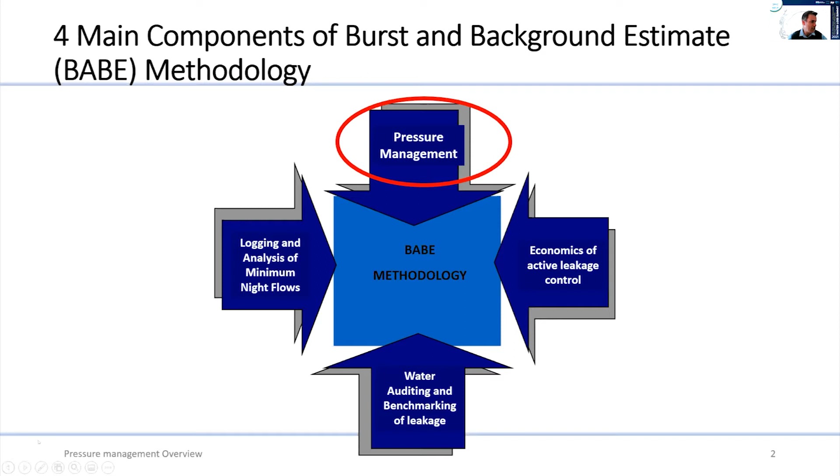It's a topic and an aspect that we are quite passionate about, and we see pressure management as one of the low-hanging fruits in water loss reduction. If it is possible to reduce pressure in a system, then you should be able to achieve significant savings from that pressure management.

Having said that, we realize that pressure management will not work in every single system. Ronnie mentioned the example of India, and I recall when Ronnie invited me to that training course many years ago. I did a presentation as I'm doing now, and went on about the benefits of pressure management, that you should do pressure management to save water. After the training course, one of the gentlemen raised their hand and said, 'But how are they supposed to reduce pressure if there is no water?' So I had to acknowledge that you cannot implement pressure management in every single area. But where it's possible to implement pressure management, that's certainly one of the low-hanging fruits that should be considered.

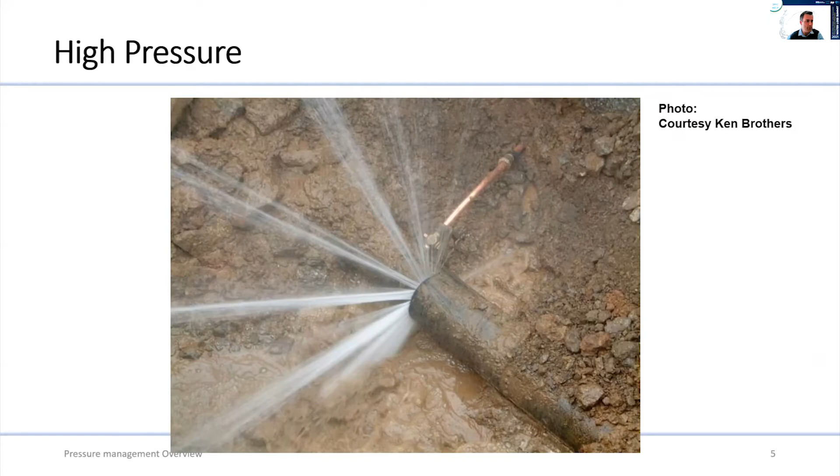So what we've noticed in some municipalities is that as a pressure reduction tool, some municipalities use an isolating valve, where they throttle the valve in an effort to reduce the pressure in parts of the network.

It's relatively cheap to install a valve, and in many cases there are already valves on the system. But the problem is that isolating valves are not made for the purpose of throttling. The valve is not going to last long if you use it for throttling, and you cannot regulate the pressure. So if you throttle the valve, you don't have control of what the pressure would be that evening, once the flows have gone down. So it's really not an ideal tool to use for pressure management.

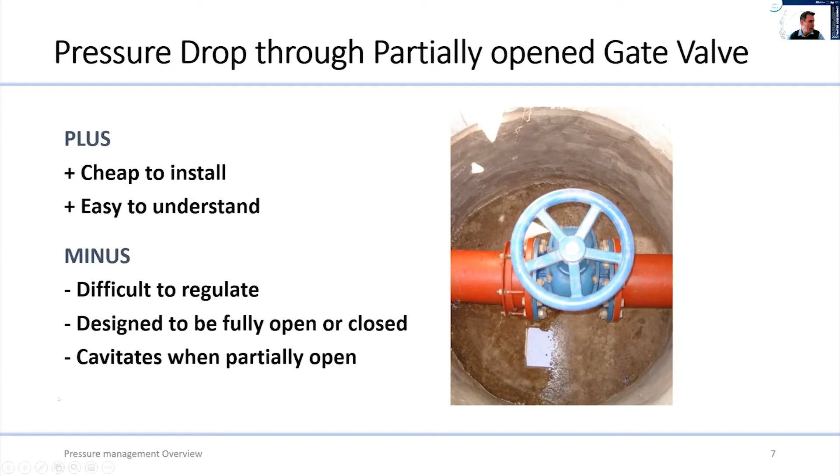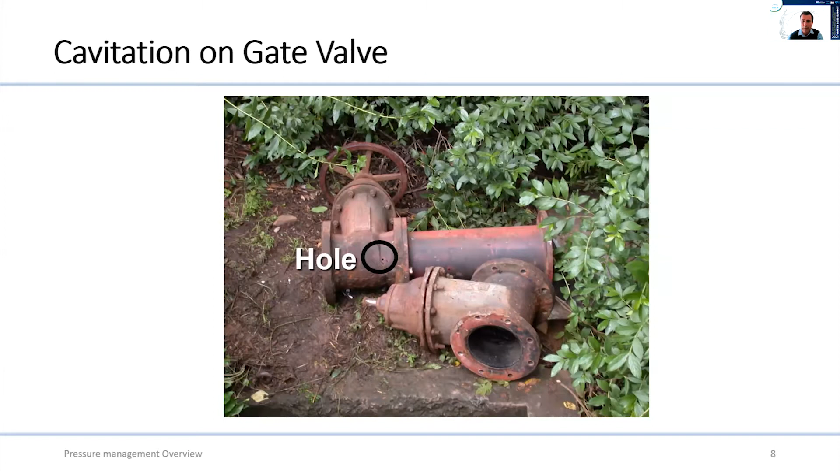In this photo, we can see a gate valve that was used for throttling, and eventually the cavitation just ate a hole right through the body of that gate valve. So it's not an ideal option for pressure management.

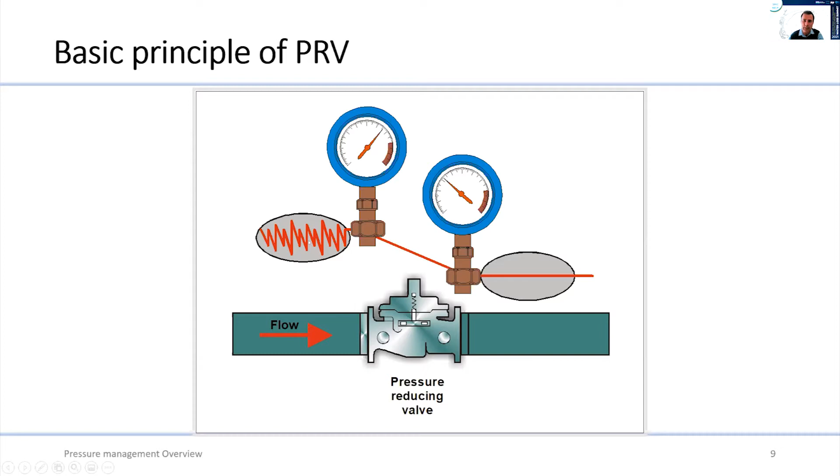So what we rather use for pressure management is a pressure reducing valve. This is a schematic of one where the high pressure comes in on the left-hand side of the valve, and the pressure reducing valve lowers it to a lower pressure. Regardless of the flow rate, whether high or low, and regardless of changes in the upstream pressure, if the PRV works correctly, it will give us a fixed pressure on the outlet. That's what we want for pressure management. We don't want a throttled gate valve that will give us a varying pressure depending on the flow rate; we want a fixed outlet pressure regardless of flow or upstream pressure changes.

So if we zoom in a bit more to the inside of a PRV, this is how it will look if you cut it in half. This large valve here is the PRV, and on top of it is a smaller valve, the pilot valve. You set the PRV by adjusting the pilot valve. Once you go into it, it's actually a fairly simple operation where you balance water pressure against the spring tension in the pilot valve, and that's how you set the PRV. You basically balance water pressure against spring tension, so it's not an overly complicated system.

You've got a few parts and moving parts, so it's a bit more complicated than a normal gate valve, but you don't have hundreds of moving parts here. There's a few parts, a few springs and a few rubbers, so it's not too difficult to understand, but the basic concept is equalizing water pressure against spring tension.

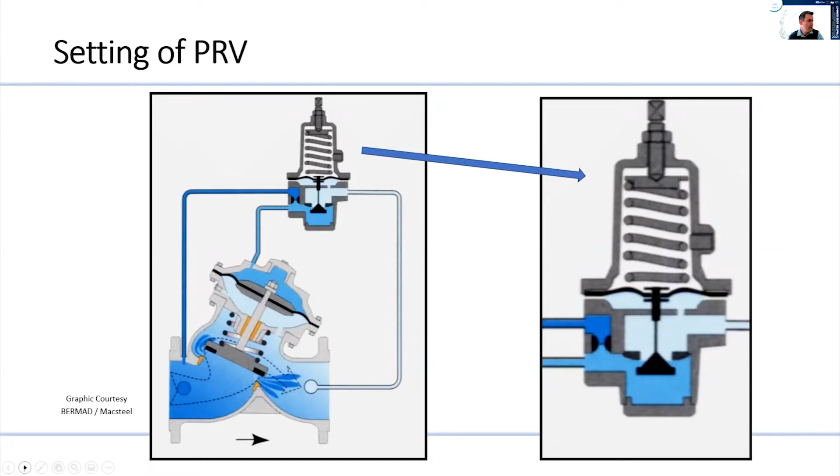So there's lots of different companies that sell PRVs. I know Ronnie likes to talk about the green, the red, and the blue PRVs. There are many companies that sell PRVs, also in South Africa. So normally when we get asked what type of PRV should be used, it's very similar to the answer Stuart gave earlier on leak detection equipment: it doesn't really make a big difference which company's valve you use, as long as it's one of the recognized companies, and as long as you're going to get backup service from that company where you bought the valve. You should be able to come right with any of the large, known companies.

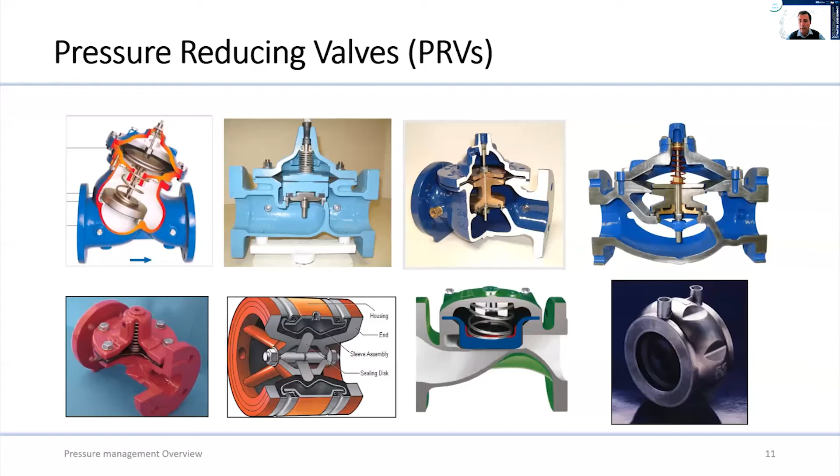So the next few slides, we'll look at different pressure management options. The first one is going to be a fixed outlet PRV, where there's just that pilot valve, which I've just shown on the previous slide. The next one is a time controller on the PRV. The third one is a flow controller on the PRV. And the fourth one is a closed loop, or intelligent, controller. So we'll go through the options.

So the fixed outlet PRV, the first option: the PRV is set to a fixed pressure, as we've seen on that previous slide. If you install a data logger on a fixed PRV, you should see more or less a straight line if you log the pressure downstream of the PRV. It's a fixed pressure at the outlet of the PRV. It's fairly simple to set up and maintain, but you must set it at peak demand periods.

Because the PRV cannot change the outlet pressure, you need to set the outlet pressure for the worst case scenario, when the pressure in the critical point of the network is going to be lowest.

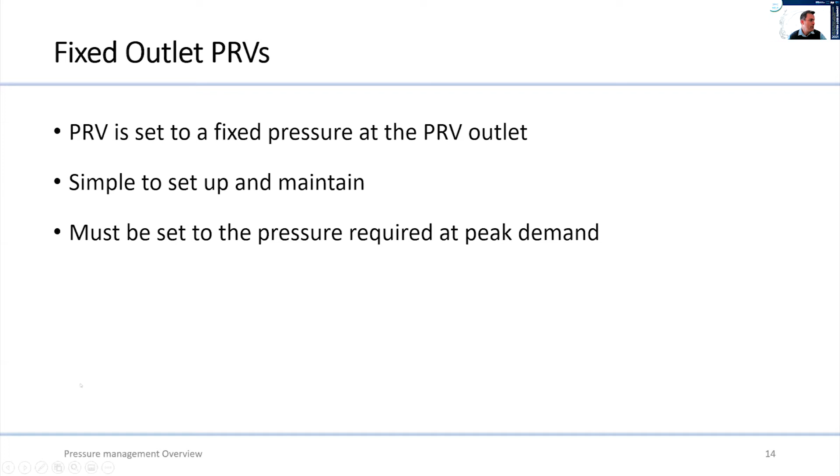So if you use pressure management with a fixed outlet PRV, we've seen many examples where significant savings can be achieved. So this is an example from Johannesburg.

On the left hand of the graph is the PRV downstream pressure, the purple line, and the blue line is the flow, before a PRV was set and commissioned. On the right hand side is the same PRV, but at a lower PRV setting. One can see just by lowering the setting from there to there, the significant impact that made on the flow going into the zone.

The main reason for that is leakage is driven by pressure. So if you are able to reduce the pressure in the system, you will reduce the leakage. And if you reduce the leakage, you reduce the total input of flow into that system. And that's what we're seeing on this graph.

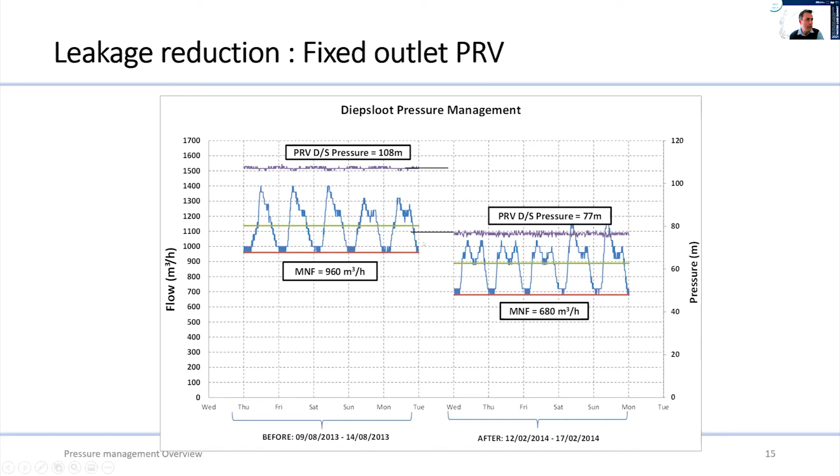So this is a schematic of how a fixed outlet PRV in the network will work. The PRV is on the inlet of the zone, and on the far end of the zone, the critical point, you are going to get some pressure variance because you've got some pressure head loss through the zone from the point where it gets in at the PRV, traveling through the zone up to the critical point.

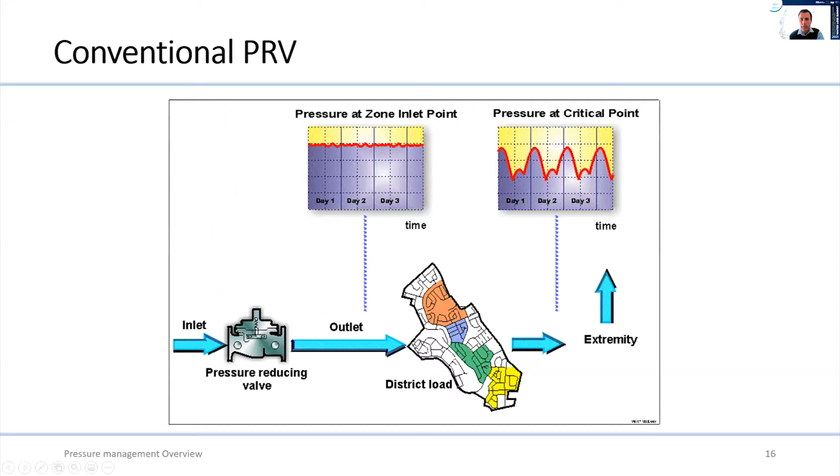Obviously, that will vary from zone to zone, depending on the size of the reticulation. But normally, you're going to get some variance at your critical point.

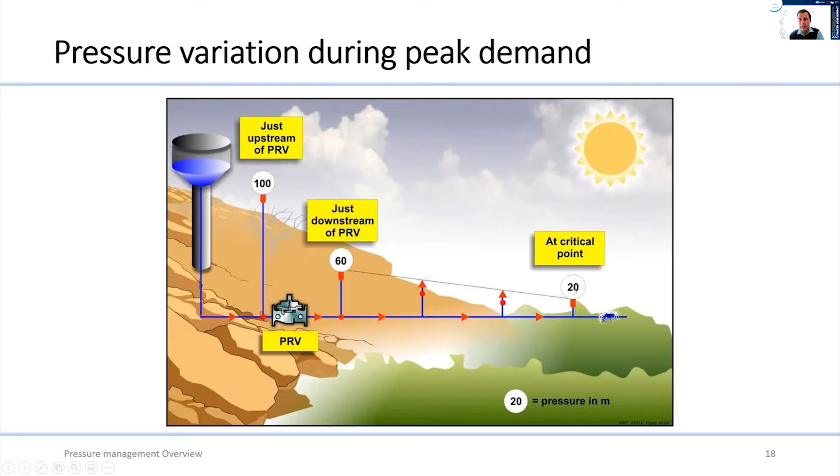This schematic shows that the PRV, in this case, is set at 60 meters of water pressure. Because of the pressure loss through the system, the pressure that ends up in the middle of the day or at the peak hour at the critical point is about 20 meters. So in this example, you have to set the PRV high enough that you get the pressure of 20 meters at the furthest end or the highest point of your zone.

At night, the pressure in that zone is going to increase as people use less water. There's less flow and then less friction, so the pressure is going to build up in your zone. So that tells us if there is a way to reduce the pressure at night further than the pressure during the day, one should be able to achieve additional water savings.

And this is where advanced pressure controllers come in. The pressure controller is installed on the PRV, and it allows you, during off-peak periods, to further reduce the pressure.

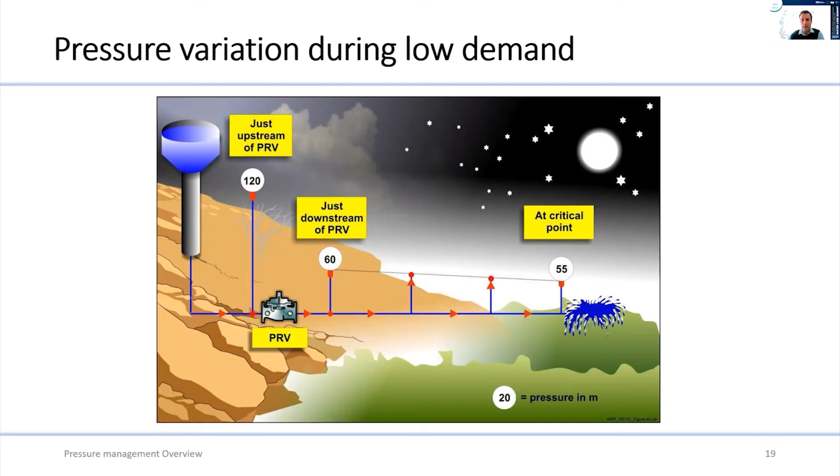The first example of a controller is the time controller. It provides a fixed time variable, so you literally set the controller to, at a certain time in the evening, lower the PRV outlet pressure to a certain level, and then the next morning increase it back to the same level. So every day and every evening it will switch between the higher and the lower pressure.

By doing that, you remove some of the excess pressure at night, and then you are able to achieve additional water savings compared to a fixed outlet PRV.

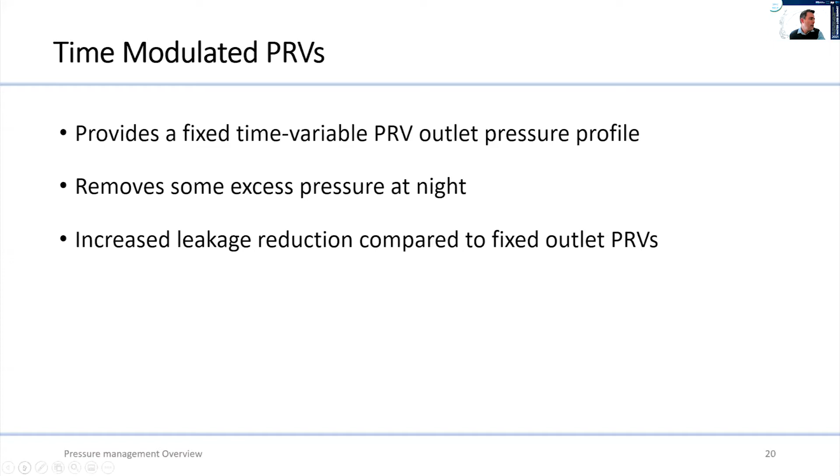The schematic for the time controller looks slightly different to what we've seen previously from the fixed outlet PRV. Because we are now reducing the pressure at night with the time controller, we are able to achieve slightly less variance in pressure at the critical point, since we are taking out some of that excess pressure by reducing the pressure at night at the PRV. By reducing the pressure at night, we are achieving additional water savings.

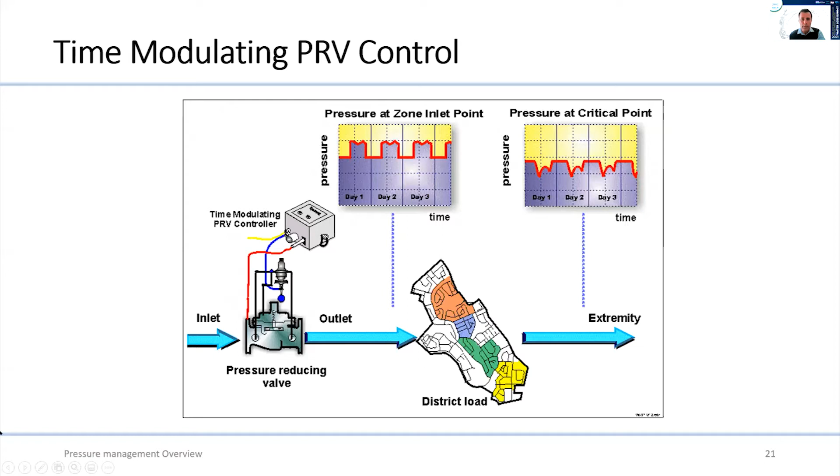This is a graph showing a time controller on a PRV. During the day, the pressure on the outlet PRV is slightly higher, and then during the night, the pressure is reduced. It goes on every day, and every evening it goes slightly up and slightly down, depending on the settings and the times that controller will go up and down. By reducing the pressure at night, one is able to reduce the leakage further in that zone.

The next type of controller we'll discuss is the flow modulated controller. In a flow modulated controller, the controller modulates the PRV outlet pressure depending on the flow that goes through that PRV installation. So the higher the flow, the higher the pressure, and the lower the flow, the lower the pressure.

The reasoning is that during peak hours, when the flow is higher, there would be a requirement for higher pressure. And in off-peak periods and at night, when the flow is lower, there would also be a lower pressure requirement in the zone.

So by using a flow modulated controller, one is normally able to get a straighter line of pressure at your critical point—not exactly a straight line, but straighter than some of the other controllers. And if you set it up correctly, you can achieve higher water savings than with a fixed outlet controller.

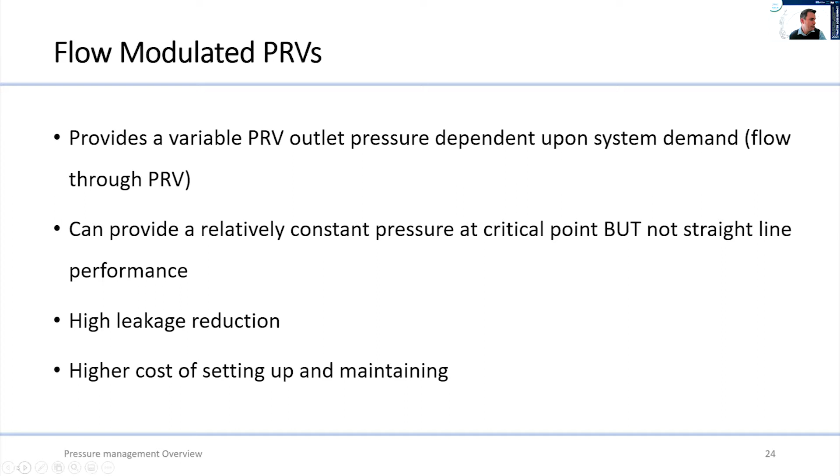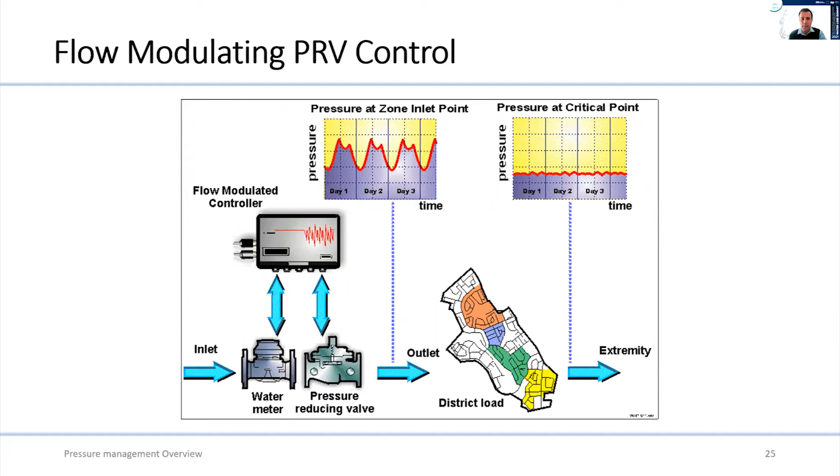Again, if you are able to set this up correctly, you should be able to achieve significant water savings. But it also comes at an additional cost, and there are now more factors to take into account.

For example, the communication between the critical point logger and the controller—you need to consider what happens if that communication is not there anymore. So there's a bit more that can go wrong with this controller than with some of the previous options. We would consider this controller maybe in certain zones where significant additional water savings can be achieved compared to some of the previous methods shown.

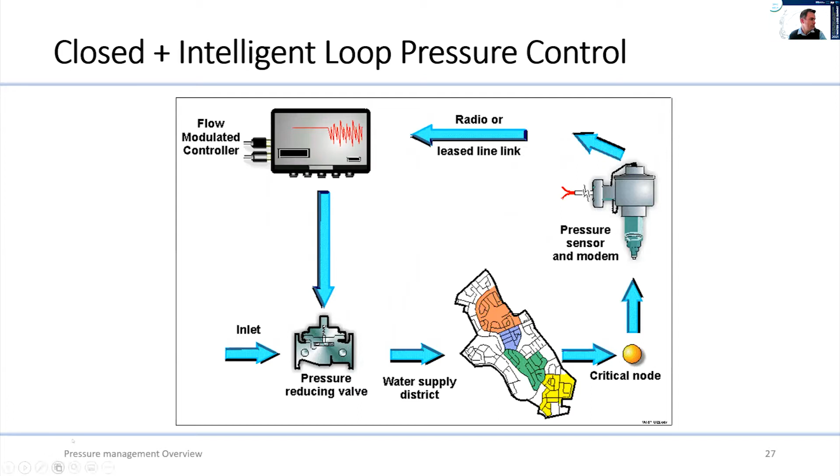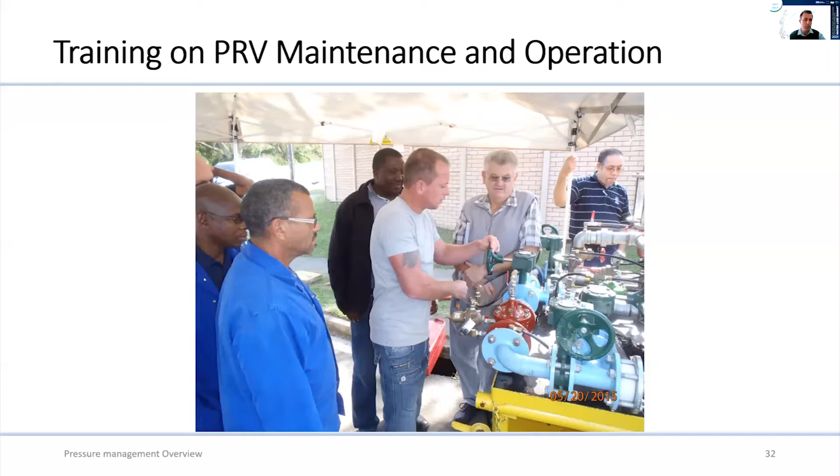So maybe the IT people on the poll, is it possible to put the results now on the screen? All right, okay, so just for interest's sake we can quickly scan through these. Right, okay, I've got the results on the screen.

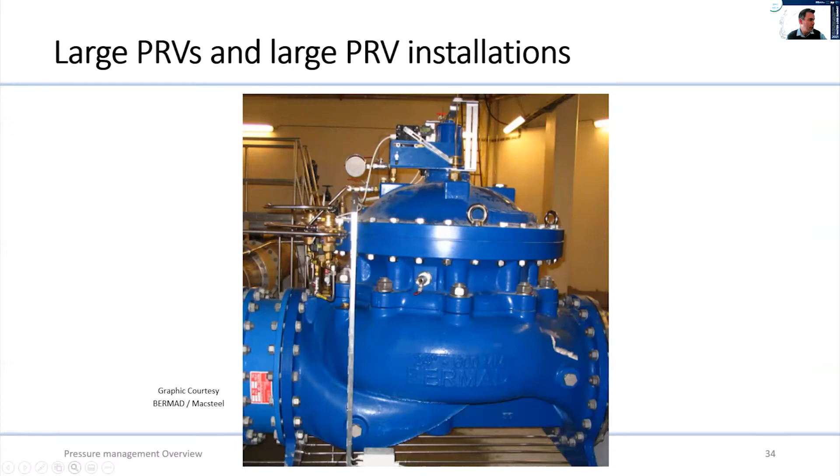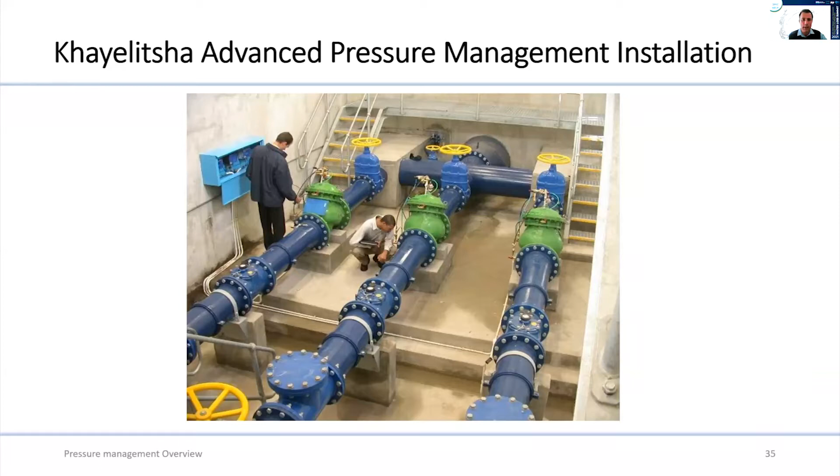The savings achieved on this Khayelitsha installation were enormous. It resulted in water savings of 9 million cubic meters per annum, an incredible water saving for one project.

Cape Town is also busy with a new PRV installation. Khayelitsha has developed over the years and the demand has grown, so Khayelitsha is now getting a new bulk supply from the eastern side. With that new bulk supply there was also a need to install a PRV. We assisted with the mechanical design, and Ingerop is doing the structural design and implementation. That installation is currently under construction, and they hope to commission it in the next few months.

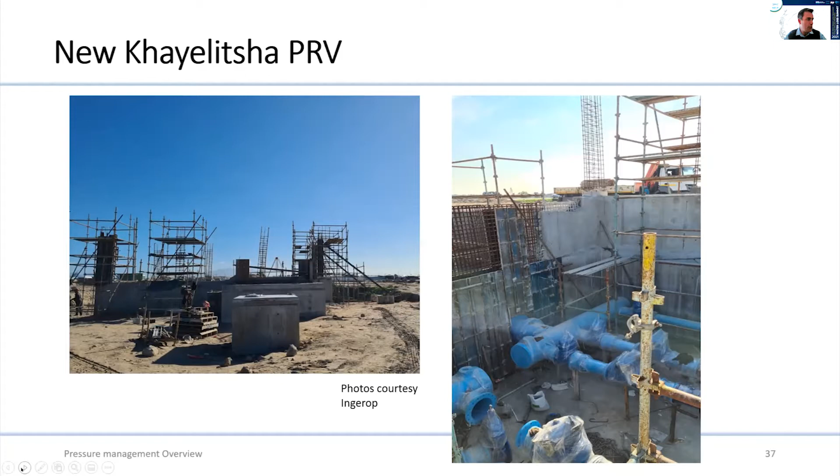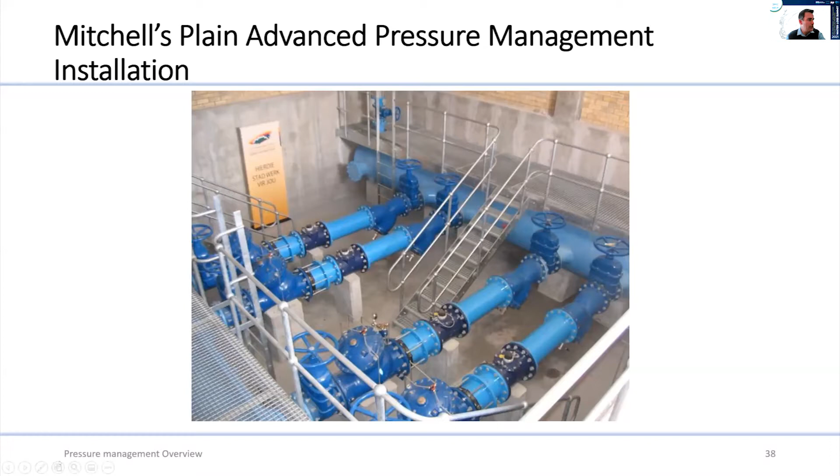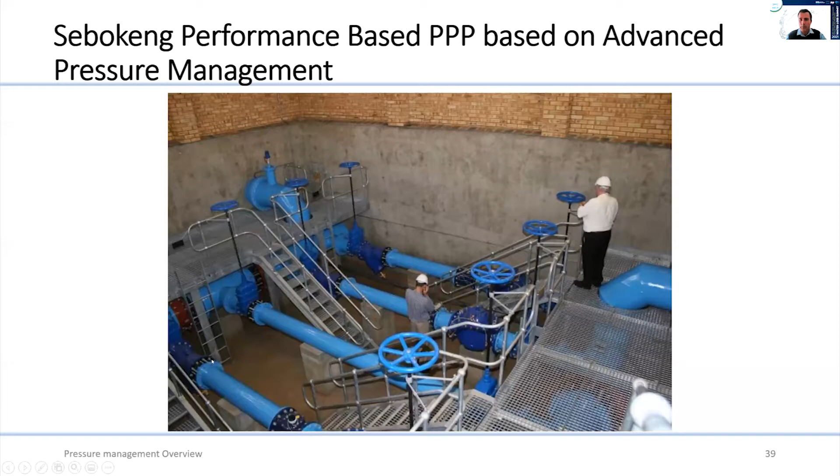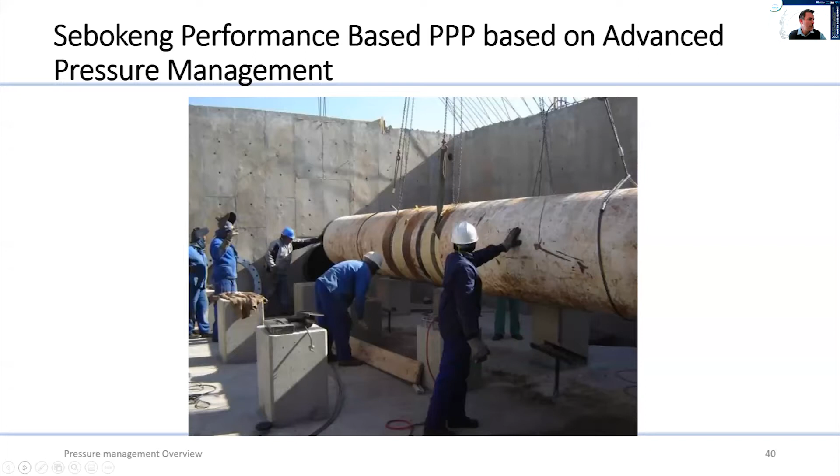The third large PRV installation is in Sebokeng, Evaton. There's a photo of the Sebokeng Evaton PRV installation, and a few photos of the construction process - the pipe before the PRV was installed, and the complete PRV installation that was cut in on one day.

There was a requirement from the municipality that the water supply to Sebokeng and Evaton had to be back online within a very short period. Between the team that designed the PRV and the contractor, they came up with a plan of constructing the whole PRV installation on the side, and then once the water pipes were cut into, that complete installation was lowered in place. The water was back on, in less than 8 hours from start to finish.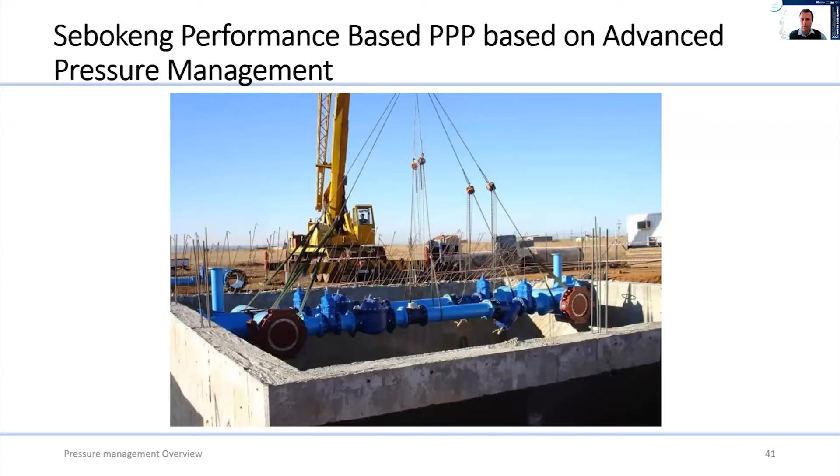The Sebokeng installation also achieved significant water savings - 8.5 million cubic meters per annum. This shows that where it's possible to install a large PRV installation, the savings achieved can be astronomical. In the case of Sebokeng, it's approximately 2 Olympic-sized swimming pools every hour, or 2,800 cubic meters of water night flow.

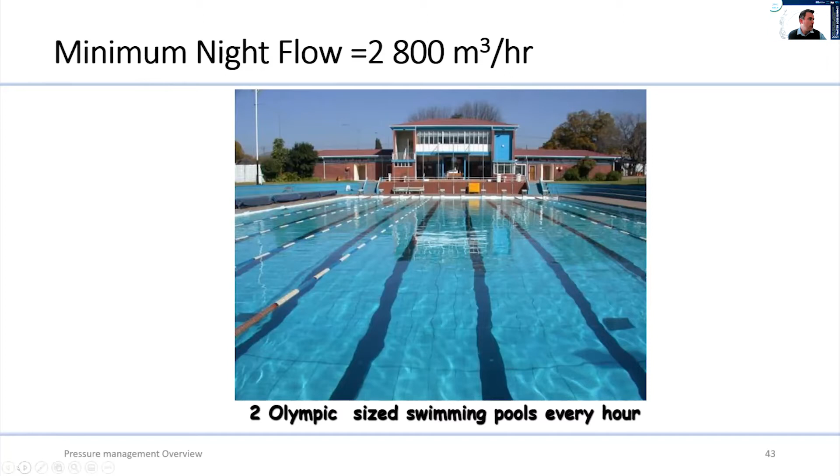So in summary, the large PRV installations - we were able to achieve significant water savings.

The last two slides I'll show are on PRV security. We've seen over the years that unfortunately, in many cases after lots of effort was done to get a PRV installation to look really good, and you've maybe installed electronic equipment to monitor and control the pressure, if you then get vandalism and theft in that same installation, it can significantly set back the municipality's plan to reduce water loss. So where possible we try to encourage municipalities to secure PRV chambers, because it's very easy to vandalize a PRV chamber if you can get inside. There are a number of solutions - the one on the screen is quite an advanced one.

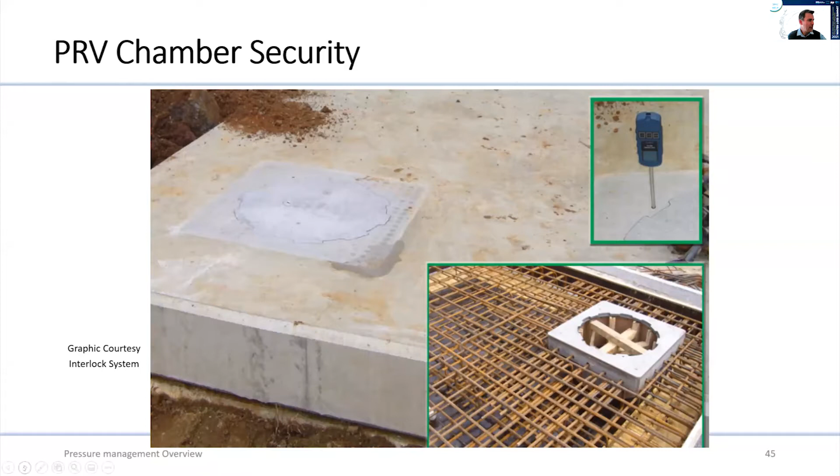We equipped the PRV with a new pilot valve and installed the data logger. A week after that, everything was stolen. Then I realized there was a reason why that snake was in the chamber. So I laughingly look back at it now, and I think maybe there's some merit in that, but only for municipalities that are able to handle the snakes in the chamber.

So thank you all, I'll leave it then. That's the end of the presentation. Thank you.

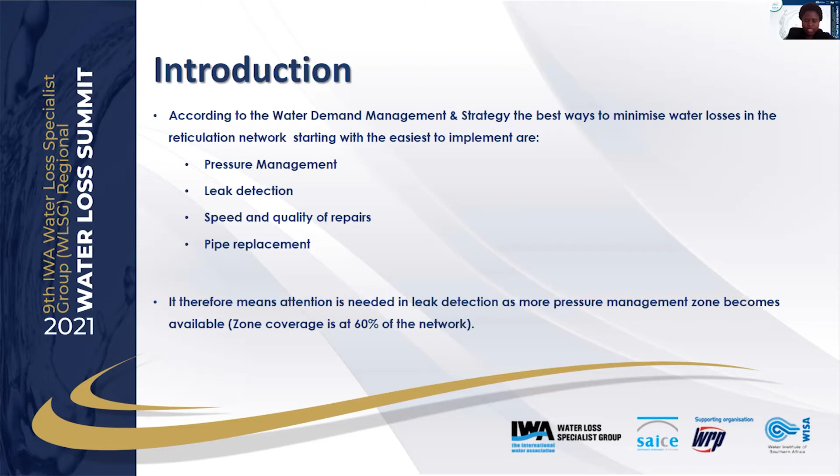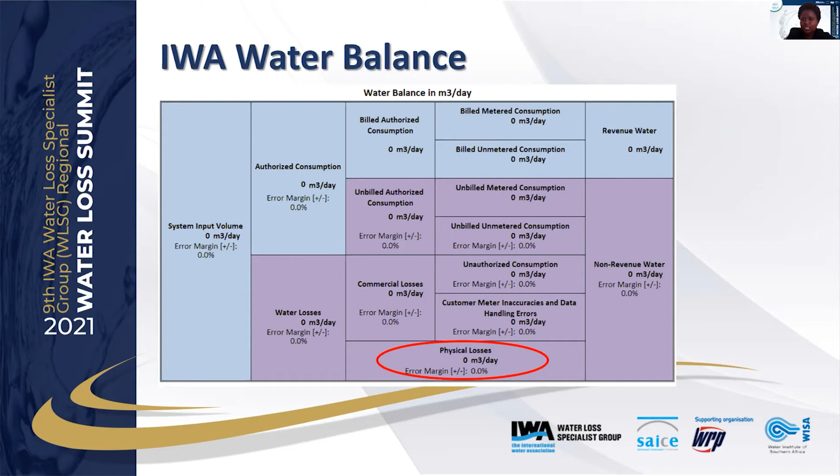In our water balance, leak detection aims to reduce the physical losses, which will benefit in reducing the non-revenue water. Why are we doing leak detection?

We detect the existing visible leaks. There are those leaks that are not reported, that go unnoticed for a lengthy period of time. We detect existing non-visible leaks, using different leak detection equipment to detect noise emitting from the reticulation network, such as valves, fire hydrants, and service connections. We give support to reticulation depots to pinpoint and locate the location of existing leaks. As we know, water finds the way of escape, which is not necessarily where it is originating from. So we detect the origin of those leaks.

We also improve repair response time by reporting all the leaks, creating a C3 notification to the relevant depot, so that the depot can attend to and repair those leaks. The target response time is 2 days.

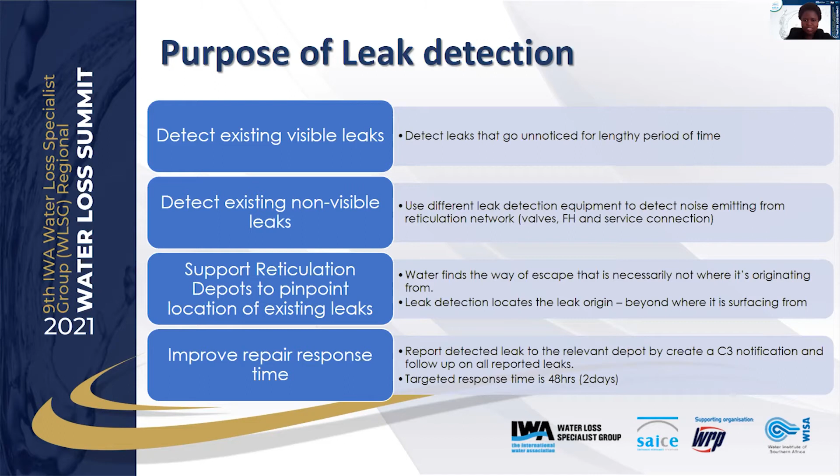The equipment we use at the City of Cape Town includes the mechanical listening stick. It is used at all contact points, such as meters, valves, and fire hydrants, to detect the noise emitting from possible leaks. We also have the electrical listening stick, but the mechanical one seems to work best for us. I guess our hearing ability is too sharp.

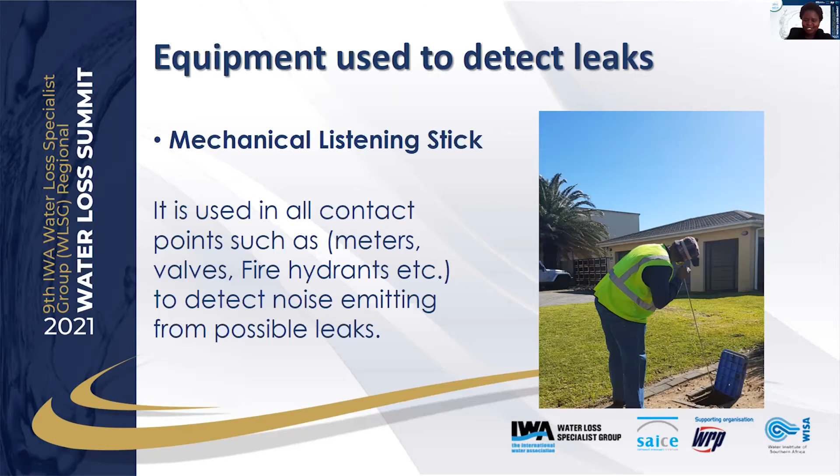We also use noise loggers. These are deployed on every pipe fitting, such as valves and fire hydrants, either valve to valve or valve to fire hydrant, detecting the noise emitting from possible leaks. We program them over a predetermined period of time to record any leakage noise. As mentioned, the best time is 2 a.m. to 4 a.m.

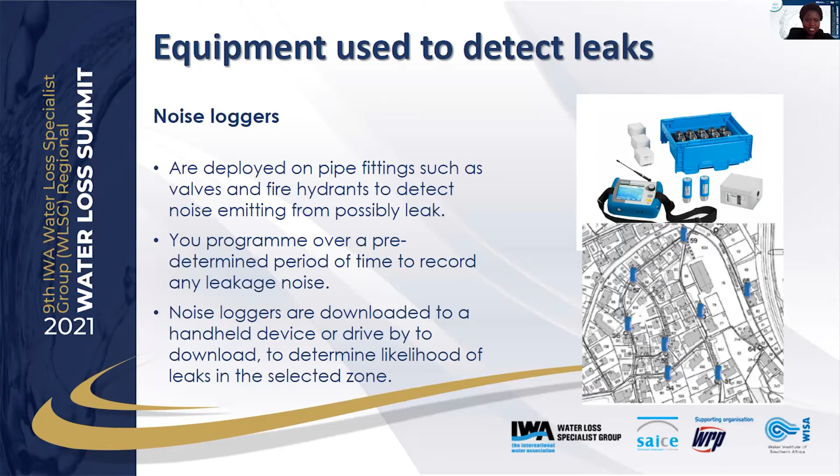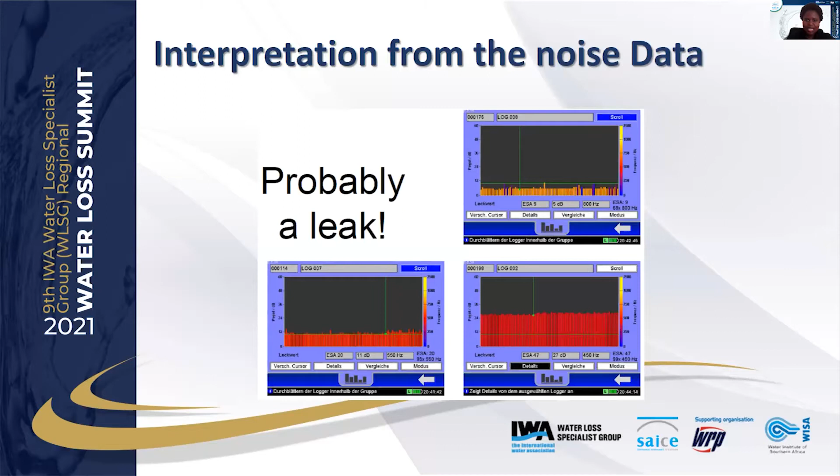Then we use the leak noise correlator to locate the leak. Fire hydrants, valves, and meters are used as points of entry to the pipeline. You must know your pipe details, such as pipe material and pipe diameter, and then measure the distance between your two sensors.

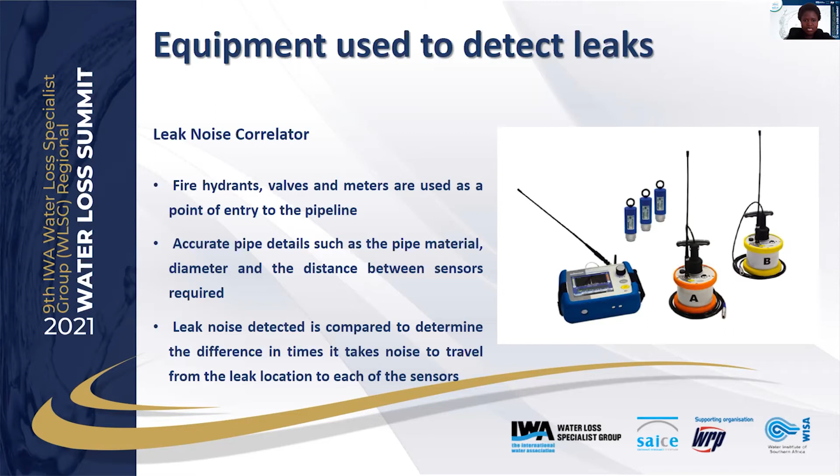The picture coming up now shows that after you have done your correlation, you measure where your correlation curve is. In this screen, it's showing that it is closer to sensor B. So we measure from sensor B to where the leak is, at 10.2.

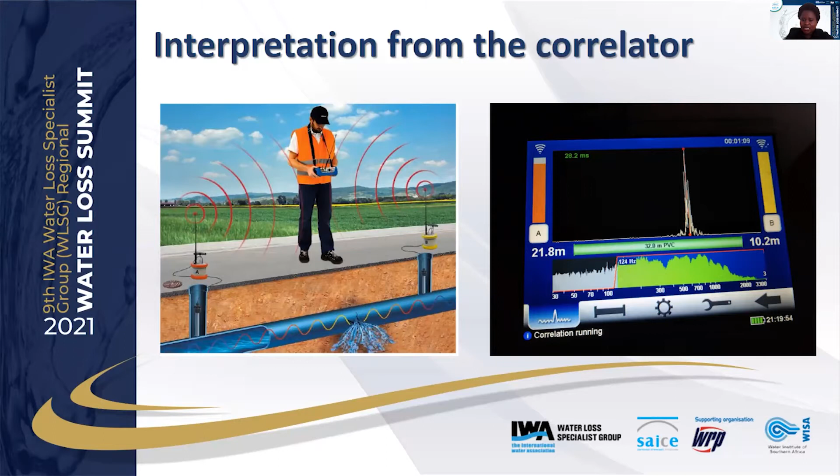You then use your ground microphone to pinpoint or confirm the correlation results you've got, to pinpoint the leak. The ground microphone does not need any contact point; you can use it on the surface of the ground. You move it along the ground surface above the underground pipeline. The principle of this device is that the closer you are to the leak, the greater the leak noise will be.

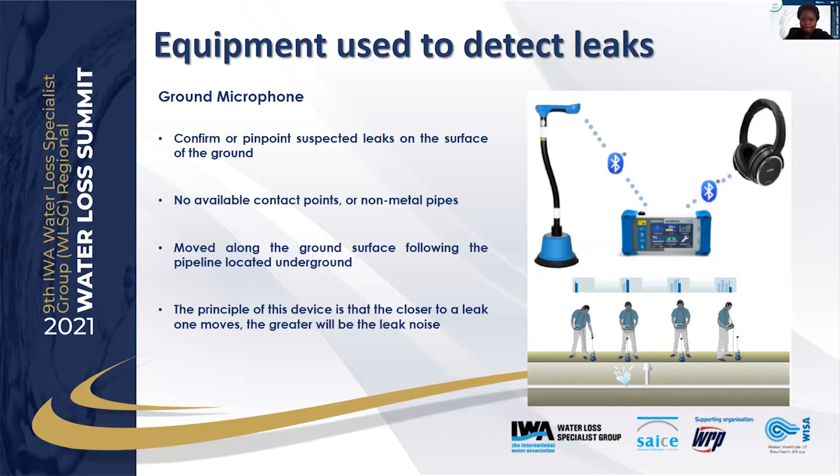We also use temporal data loggers on the DMAs that don't have permanent controllers. It is used to measure the flow and the pressure in order to analyze your minimum night flow.

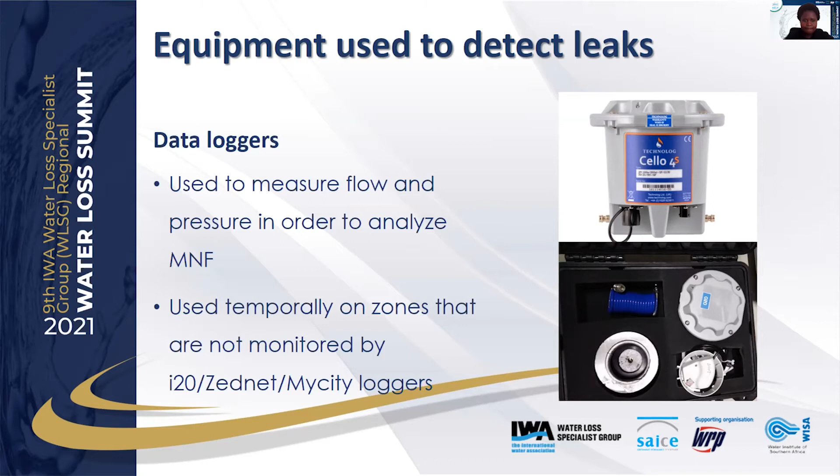Another piece of equipment is the GPR, the ground penetrating radar. We use it to locate services that are underground, mostly to locate the pipe direction and depth. If we're working in an area and we're not sure whether the pipe stops, continues, or which direction it's moving, we use this equipment. It's very helpful so that as we use our ground microphone, we know where the pipeline is running.

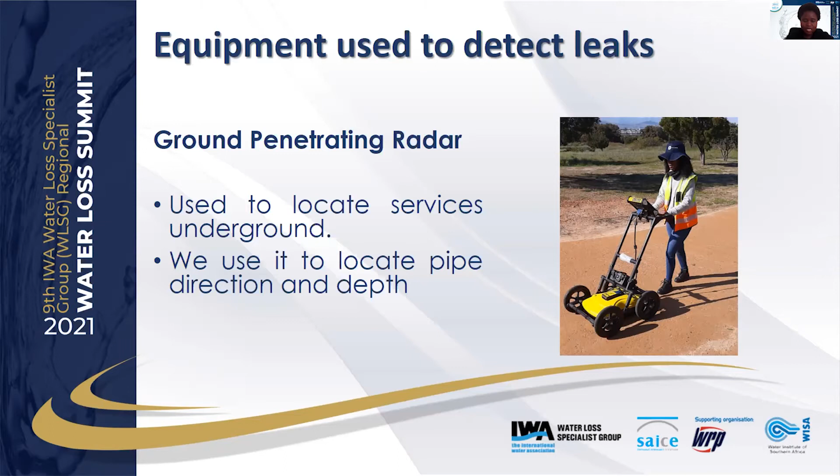The methods we use for leak detection are 4 methods. First, visual leak detection, whereby the team drives or walks on the street to inspect the reticulation network for obvious ground leaks, on the reticulation network or on service connections. We have a 3-kilometer target per team per day.

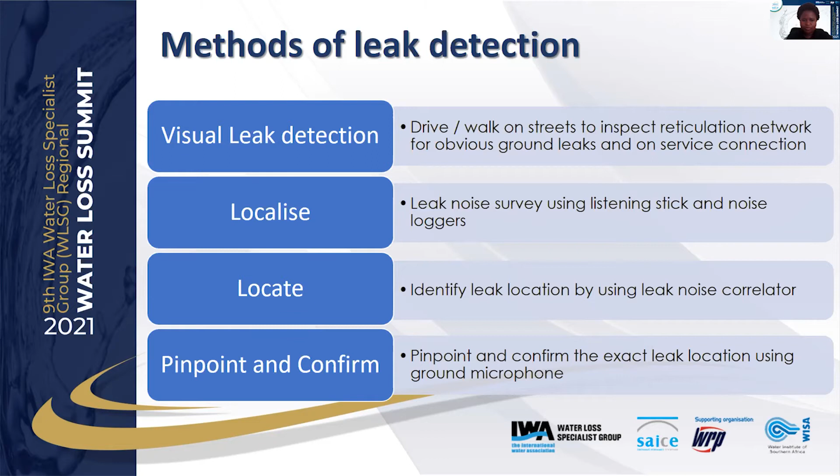We then localize the leak noise survey by using the listening stick and noise loggers. Then we locate by identifying the leak location using the leak noise correlator. Then we pinpoint and confirm with the ground microphone. A step test is also part of the process.

As we start with a bigger area, then we isolate it into smaller sections while monitoring the flow. The best time is to do it at night when demand is less, because we'll be shutting off some valves. While you are sectorizing your areas, you keep monitoring your flow. Where there is a disproportionate drop in flow, that's where the suspected leak is, and that's where your focus will be. So you start from a bigger area and shut it down into smaller sections until you get where the suspected leak is.

Then you continue using your methods of leak detection to identify where the leak is. There are different approaches we use for leak detection. For areas that are non-discrete, we use a scorecard approach, whereby we need to know the type of material, age of infrastructure, average pressure, pipe burst records, the soil type, the period of supply, whether leak detection was ever done in the area, and also the type of land use - is it residential or industrial?

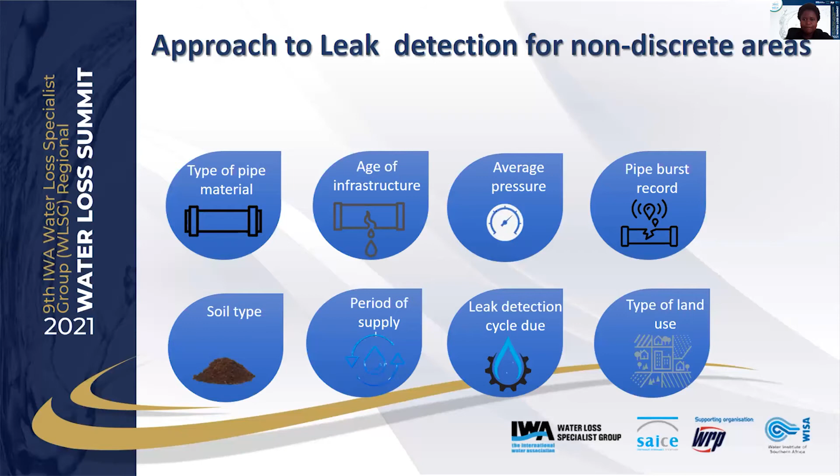Then for the ones that are discrete, we use zone analysis, because our zones are monitored by controllers such as I2O, Zednet, My City Logger, and then we analyze the minimum night flow over the average flow. For all the zones that give 30% of the average flow, we target those zones to start with.

We also use the SANFLOW model, where for each zone you must know your minimum night flow, your average pressure, the length of main, number of connections, number of properties, and residential population. It will give you an expected leakage, and if it is above the threshold that you expect, you can target those zones. We also calculate the unavoidable annual real losses.

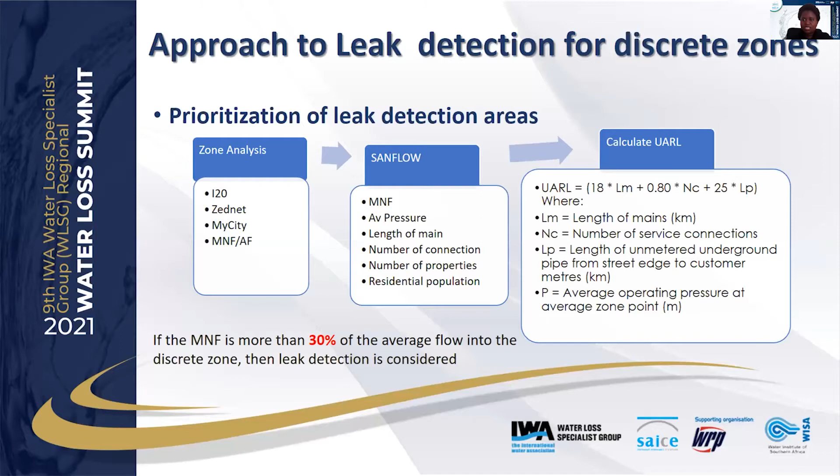So for all the zones that are above 30%, we target those areas first, because at the end of the day we want to see results and reduce that minimum night flow. This is an example of a zone with a high minimum night flow. The PRV had 8.6 cubic meters per hour, and the average flow is 16.49, giving us a percentage of 52.4. This is an indication that leak detection must be prioritized in that zone.

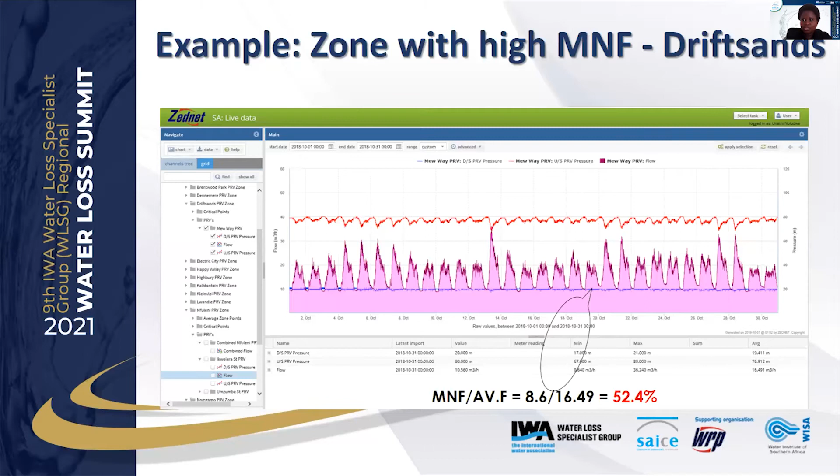So for the past 3 years, we have managed to cover the whole of the City of Cape Town network using visual methods. It's only the last financial year whereby we started to use equipment looking for non-visible leaks. Per year, we cover half of the reticulation network.

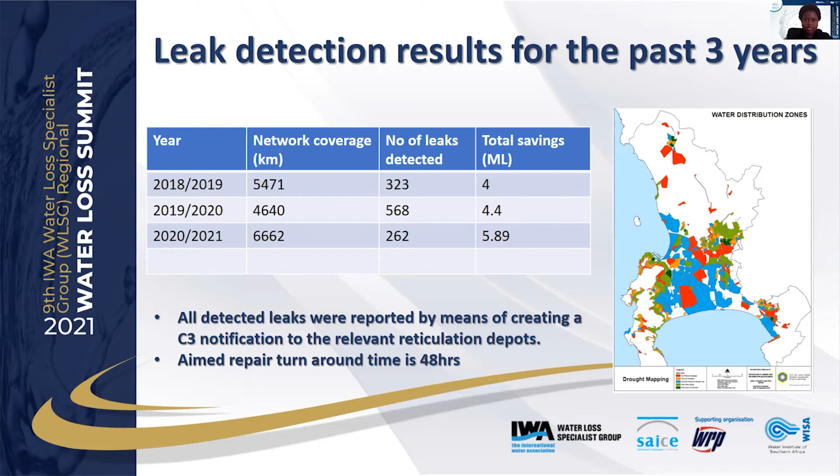So for all the leaks detected by the team, a C3 notification was created, sending it to the depots to attend to and fix them. All the leaks were fixed, but not all within the turnaround time. The turnaround was 48 hours - we still aim to repair those leaks within 48 hours. For the past 3 years, most leaks were occurring from meters, then service connections, valves, fire hydrants, not much on the main. Last on the list was the stopcock.

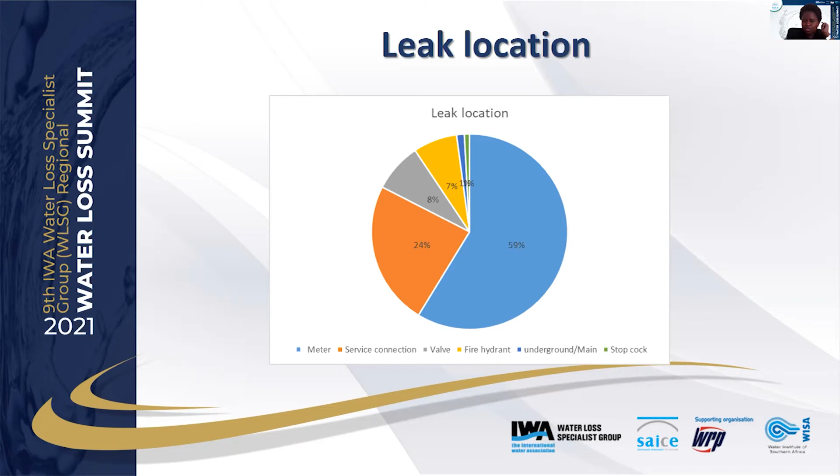This is an indication why response time is very important, because the volume for each leak, you multiply it with the response time. If the leak took a day to be repaired, that means there is less water lost. But if the response repair time period takes longer, it means you will have much more water that we are losing. Also the location duration is important to note.

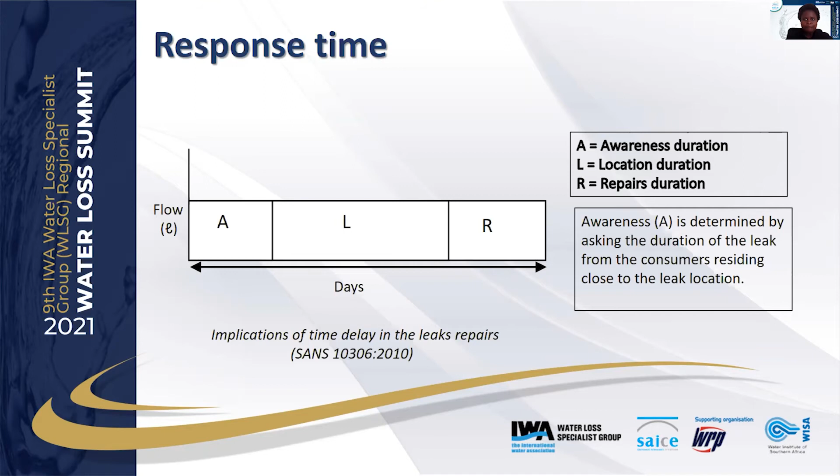So these are just pictures of the leaks that we have found. The first picture is a valve. Already the grass around it is an indication that the leak has been there for a period of time, because around it, it's not as green as it is closer to the valve. We also use a listening stick to confirm that it's not just standstill water inside the valve chamber, but a continuous leak.

Then from fire hydrants, service connections, and also around this meter, you can see this is a pavement, but around it there's green grass. So as you are walking and approaching the meter, you already know, you already suspect that there is a leak there.

So, also some pictures from the leaks that were underground. The first leak was on the main, and then the service connections. And the last picture, you can tell already that leak was caused by roots. Those tree roots diverted the direction of the pipe, and it ended up breaking.

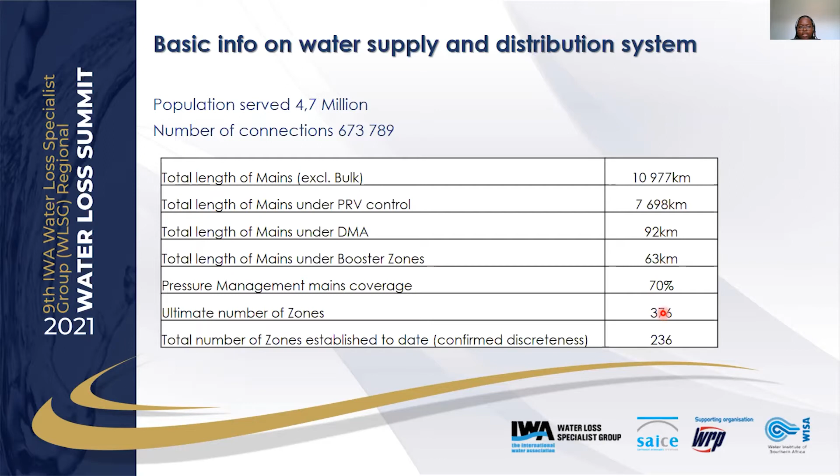In terms of zones, we've got an ultimate number of 376 water zones in the city as things are now. Of these, we have 236, just over 60%, established with discreteness confirmed for these zones. The ultimate number of zones tends to change as and when we create new zones, so that target number moves.

We also have the water demand management strategy, updated in 2017. That is very specific to our intervention in terms of measuring all water going in and being supplied to all our customers, and most importantly monitoring that the pressures are within an acceptable margin, and that we are efficiently supplying water to the customers.

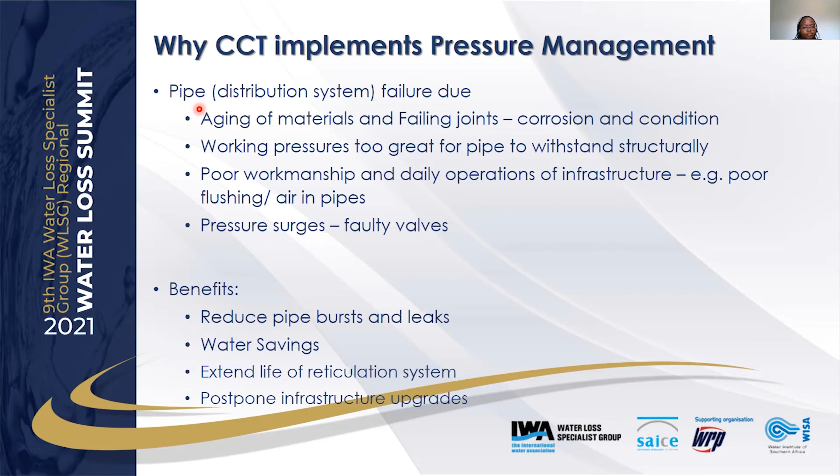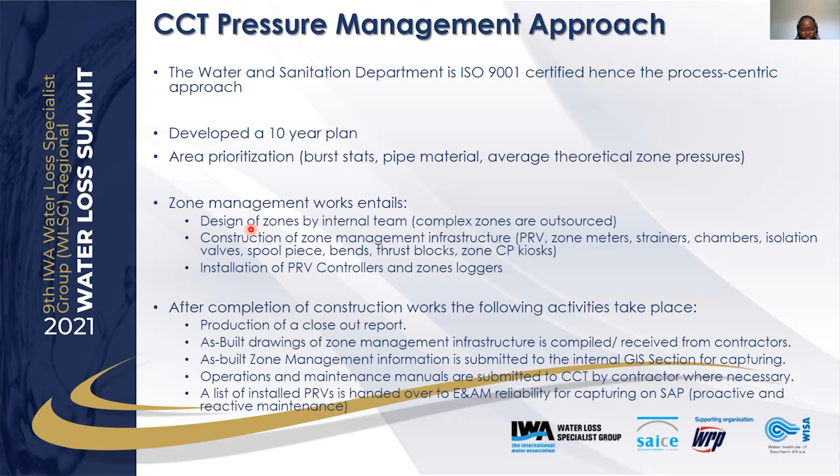After we've constructed and installed the PRVs, meters, and all other infrastructure that accompany the zones, we hand over the infrastructure information to our engineering and asset management reliability section for capturing on SAP. We use SAP as our main asset register and asset management platform. That information is captured, along with dates for proactive maintenance, where a maintenance plan is put in place for those specific PRVs. That's something we've been improving over the years.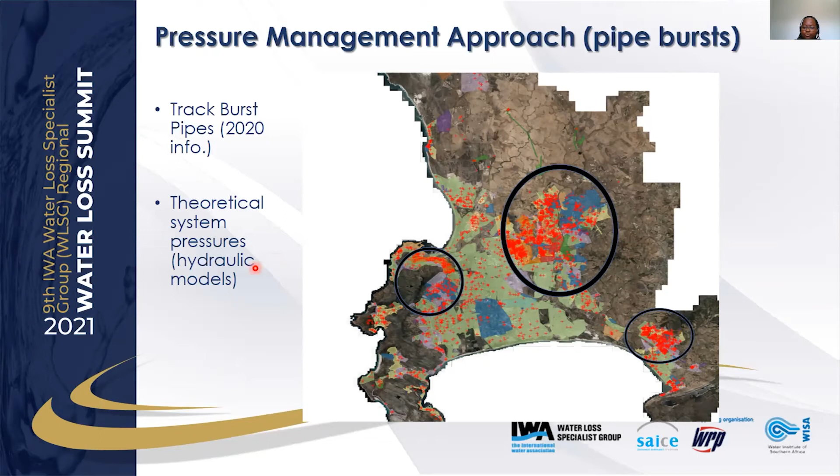So that's the key data we look at for our approach. Theoretical system pressures we obtain from our colleagues still within the City of Cape Town, who run the hydraulic model for the city. They provide us with theoretical pressures within the area so we can overlay them to prioritize appropriately. We follow the same approach when looking at pipe material. Over 50% of our network still has AC pipes or fiber cement pipe material, so we know those are sensitive. We overlap pipe burst data and pipe material as part of the matrix for our approach to prioritizing pressure management.

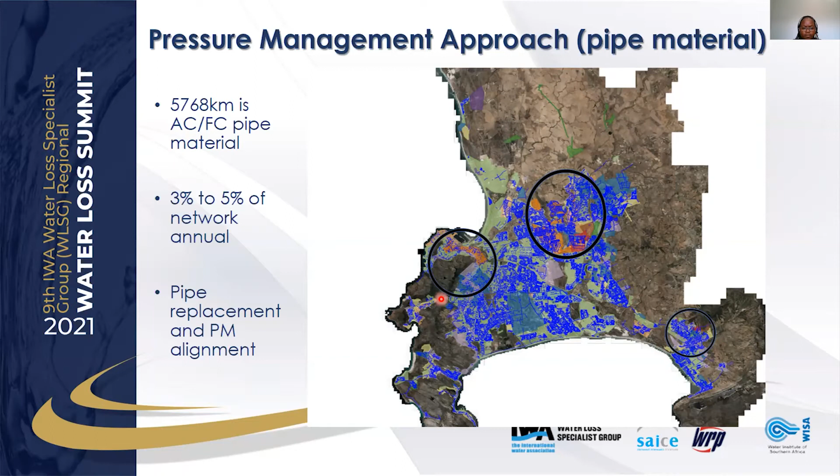We try to cover 3 to 5% of the network annually, and this coverage isn't only for pressure management per se, it's for general zone management, which includes district metered areas. Over the years, we've improved our alignment of pipe replacement and pressure management interventions.

The critical part of our zone management and pressure management zone design is to confirm and verify the discreteness of the zone. Even after we've designed a zone, and in other instances even when we've outsourced the design, we still go back in with our technical guys and confirm the discreteness of the zone. This is a typical example of such work, a near-zero pressure test stage that is part of the process we follow in designing pressure zones.

In this layout, you'll see the proposed extent of the zone. This zone was designed by WRP, if I'm correct. They identified and proposed potential boundary valves that should be isolated, and identified where the supplies should be. But prior to going into construction or allocating the work to the contractor, we go back in and check the discreteness of the zone using the information in the design report.

This is the logging data analyzed from that stage, where we log both inside and outside the zone, identify the inflows, isolate as per the proposed design, and check the zone discreteness. When we get a profile like this, we're very happy because it means the zone is discrete.

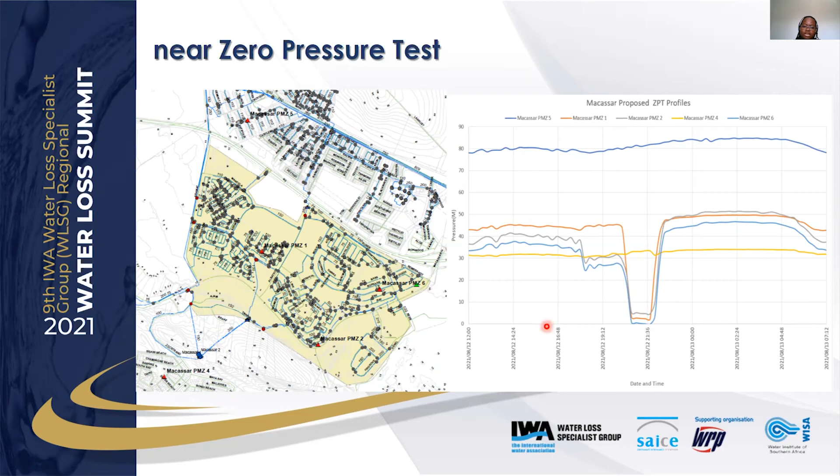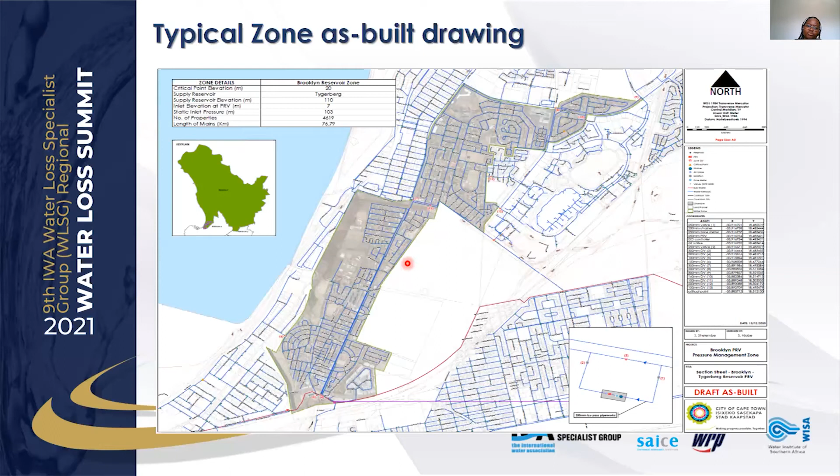This is the typical drawing that shows such information. On the right-hand side, it shows the boundary valves and their exact coordinates. It shows which region it falls under, the zone detail information, the length of main, and number of properties. This is the basic zone information that over time we've decided to consolidate into one drawing.

Our monitoring of zones is done remotely, mainly for established zones, and this was mostly fast-tracked through the drought, where we had to appoint service providers to supply us with loggers and controllers for our zones. So we monitor those and ensure their discreteness.

Our monitoring system also has alarm settings that notify operations when there are zone changes, when there are changes in the operations of the zones. We produce monthly reports that also inform operations on how the zones are performing.

Internally, we produce reports just to confirm that all information on the zone, especially the information accessible to all City of Cape Town employees in terms of upstream pressure, downstream pressure, and flow profile, is still available on the platform. We continuously try to monitor that, and we've got a tender in place to maintain the infrastructure and take care of the licensing as well.

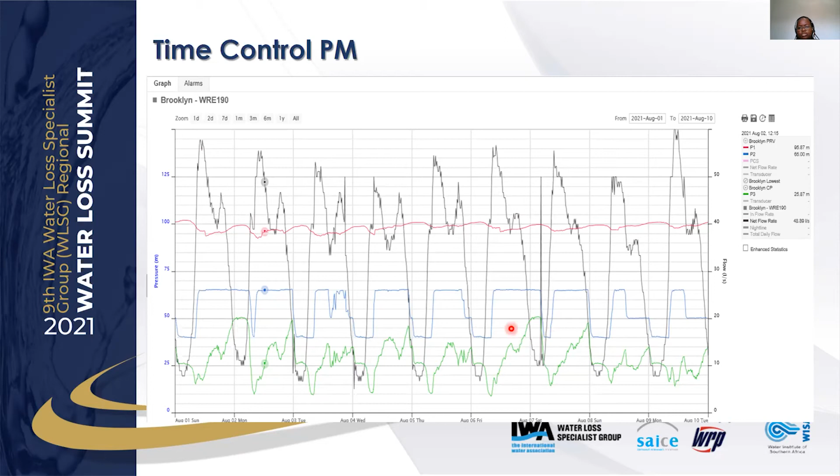We also monitor the critical point - the green line is the critical point. We monitor that to make sure we still provide the minimum requirement we've put in place, supplying a minimum of 25 meters of pressure at the critical point. We always monitor to make sure we are within that, and if not, we send teams out from time to time to do valve verification in our zones.

These are the savings we've realized through pressure management. The biggest savings were realized through the drought response. The initial target was around 52 megaliters a day, but with everybody working together, through pressure management alone we were able to realize 70 megaliters a day in savings.

As the restrictions were relaxed, we saw that reducing over time. When we brought new pressure zones into the system, the savings increased, and over time when we had to increase pressure to about 25 meters at the critical point, the savings reduced. We are currently around 20 megaliters a day in savings through pressure management.

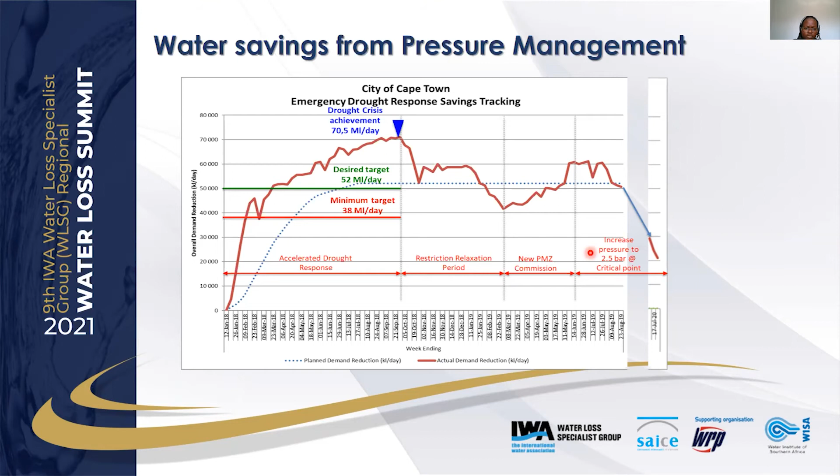This is just a graphical view of our non-revenue water. This is the system input volumes over the years. I did an extract from 2010 to date.

This is the volume of non-revenue that we've officially recorded. You'll note that from 2015 to 2018 or 2019, the system input volume was reducing. However, the non-revenue volume did not correspond with the system input volume as it was reducing. At the moment, we've explored various reasons as to why this may be so.

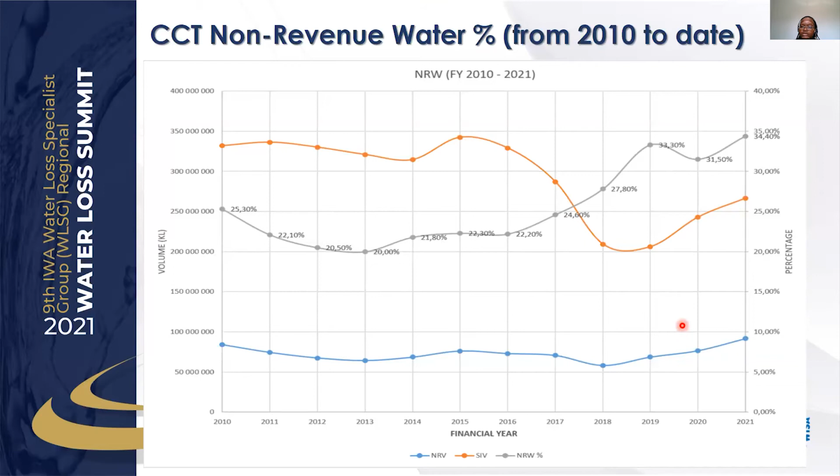We did note that in the last few years, we've actually had an increase in percentage of non-revenue rather than a reduction. We suspect that's a combination of issues around accuracy of meter reading and data. We've also picked up through our meter audit program that our meters are oversized, especially in industrial areas, and that could have contributed. Also, definitely the increase in pressure after 2018, working towards the critical point pressure of 25 meters, may have played a role in the increase in non-revenue percentage.

There are key focus areas that have now been established by the City of Cape Town to try and address our non-revenue percentage. As I said, we're currently sitting at about 34%.

So the Director of Distribution established a steering committee for non-revenue to find a way to integrate or improve the integration of approach to non-revenue. In this steering committee, there is reporting that happens in line with meter audits and meter replacement programs. This is from bulk - the bulk meter audit and meter replacement program reports to this platform and provides feedback as and when the meetings take place.

Pipe replacement program also reports to this platform. Leak detection reports to the platform. Pressure management reports to the platform. We've also started looking at the zonal water balance, the bottom-up approach to the water balance, where we produce water balances for the individual zones we've created, the discrete zones. This is still a work in progress, but it also reports to this platform, along with asset management, and education and awareness programs, which are also part of the focus areas for reducing non-revenue water.

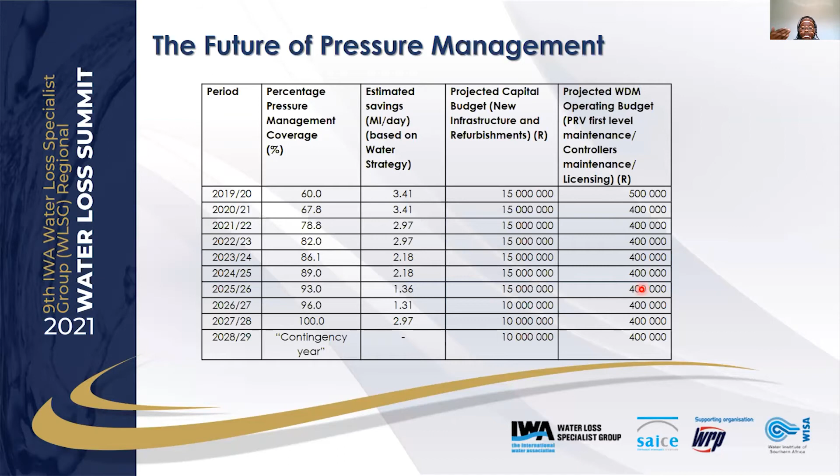We've focused more as well on the operation part of things, to keep our licenses up to date for the loggers and controllers that are owned by third parties.

Future interventions are metering and monitoring of reservoir outlets. That's one of our key future interventions, and also we would like into the future to have reservoir water balances as well.

We also want to increase visibility on the 70% of the network that's currently under pressure management, because it's not the complete 70% that we have the ability to monitor and actually report performance on. So that is also part of future projects.

We intend to install meters at our current PRV zones. We do have a lot of those old zones that do not have meters installed, so as part of the refurbishment works, these have been identified in our plans for future projects.

And also to focus more on district metered areas being established within our industrial areas, to give close monitoring of leakage levels, especially within the industrial areas. This is mainly because we picked up that oversizing does affect our ability to monitor the impact of leakage levels or even consumption levels within there.

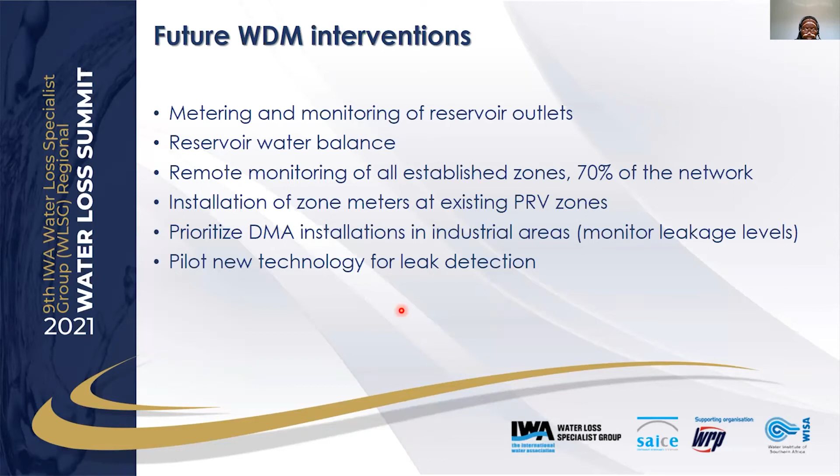The conclusion, and a recommendation as well to my other colleagues from other municipalities, is that as the City of Cape Town, we have initiated an integrated approach to water supply, and the water strategy speaks to that as well. Also, reducing non-revenue water is everybody's responsibility.

And as a City of Cape Town now, we look at it from a bulk water point of view - how are our colleagues at bulk contributing? We are making it everybody's problem and responsibility, all the way to the customer, being educated about non-revenue water and pressure management. We also believe that the effectiveness of pressure management strongly relies on the skills and knowledge of the zone operators.

So for us, it's become very important over recent years that our operations teams - the guys that run the depots, the guys that turn the keys, the isolation valves - are becoming more and more skilled and understand pressure management, and that we continuously monitor the impact of pressure management and also monitor leakage levels.

We also would like to encourage our other colleagues to understand that record keeping and documentation plays a major role in water demand management interventions, when we can record how much savings were realized, or even the economicness of an activity or intervention. So keeping those records as well.

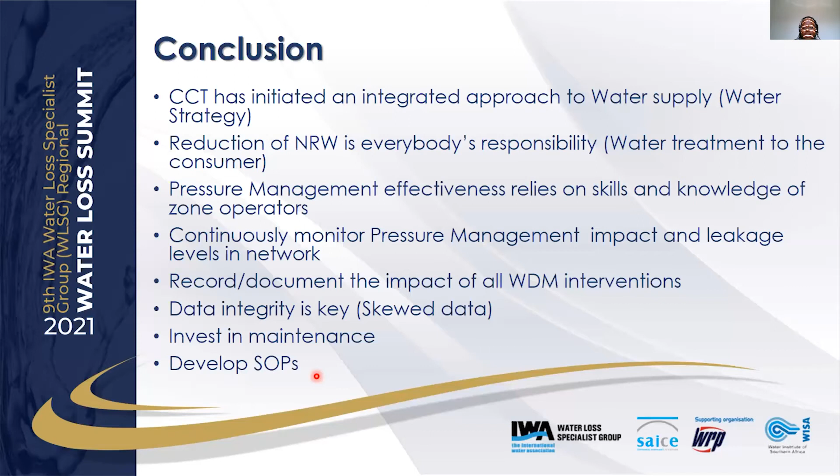And also we encourage other colleagues to develop standard operating procedures, and also just utilize them, review them, and have risk assessments for most of your activities. That's all from me. Thank you.